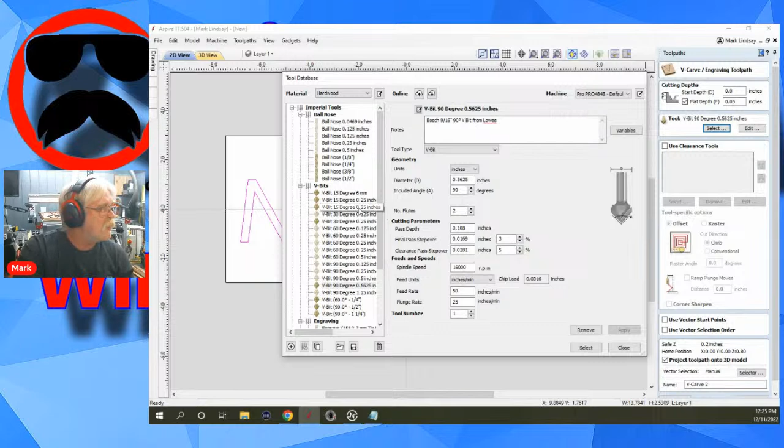Let's go ahead and get into screen share and let's V-carve this. I've got my - let's select a smaller bit than this. No, I don't want to update my database, stop asking me. My 15 degree, let's try that one. And then I'll use a clearance tool - I'll use a 1/8 inch end mill. No, let's use that one. Select. So I have two bits.

And I'll calculate, reset the preview. Now, if you'll notice, let me get rid of this one - this was the first one that I made. Delete this. If you notice, that created two separate tool paths. Okay, Michael? If you look at the little bubble that pops up, this one uses my 1/8 inch end mill, and this one uses my 15 degree V bit.

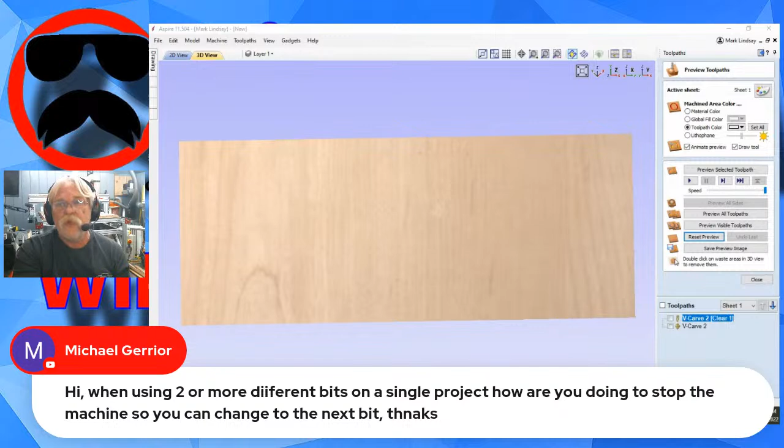So your question is, how do you stop the machine so you can change to the next bit? When you calculate the tool paths, let's go into save tool path here.

You have choices to make here, Michael. One of them is the selected tool path. Now you see I've got VCarve 2 Clear that uses my 1/8 inch bit. That is selected, it's in blue, and that is the tool path that's going to be saved right here. So I would save that tool path.

That's one piece of G code. Then I would come along and save toolpath 2. That uses my 15 degree V bit. Save that toolpath as a separate piece of G code. That's how I do it.

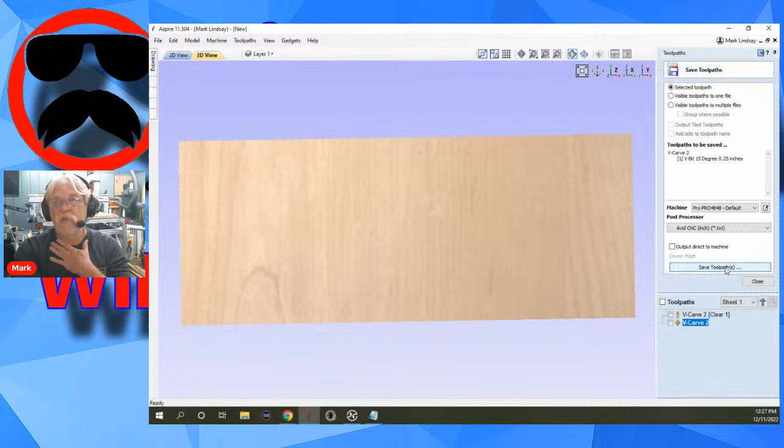You can put all of the toolpaths that use the same bit into the same G code and run those all at once, usually, not always, and then save the other type of bit, all of the toolpaths that use that other type of bit, as a separate piece of G code.

That's what I do. I do that because that way I'm in control of how long this carve is going to take. If it's a complex pattern and I've got 5 different bits I'm going to use because there is 3D artwork that'll use 2 different bits, and then a 3D clearing toolpath that's going to use another bit, and then a pocket and something else, like a V carving or what have you.

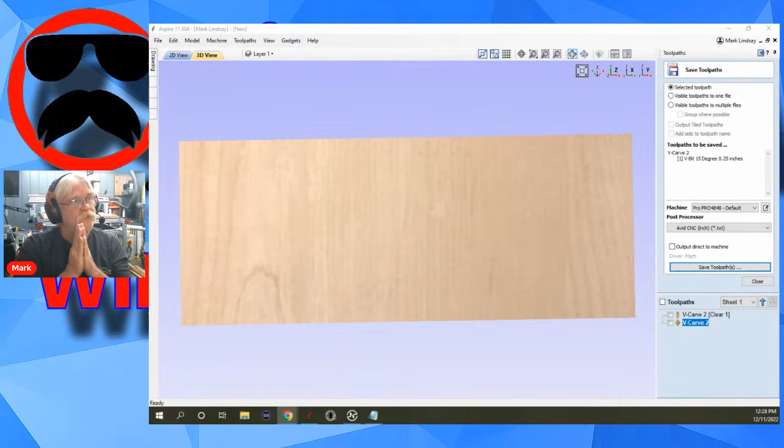If you put all of those toolpaths into one piece of G code, you're more or less trapped depending upon your controller software. Most controller software has a way for you to stop and then later on come pick up from where you left off. Not all, but most do. I would say 99% of them do. I can only think of one that didn't, and it may now allow you to do that.

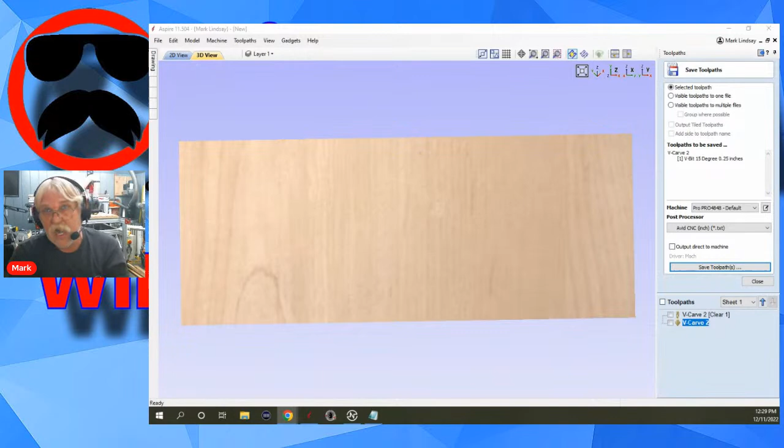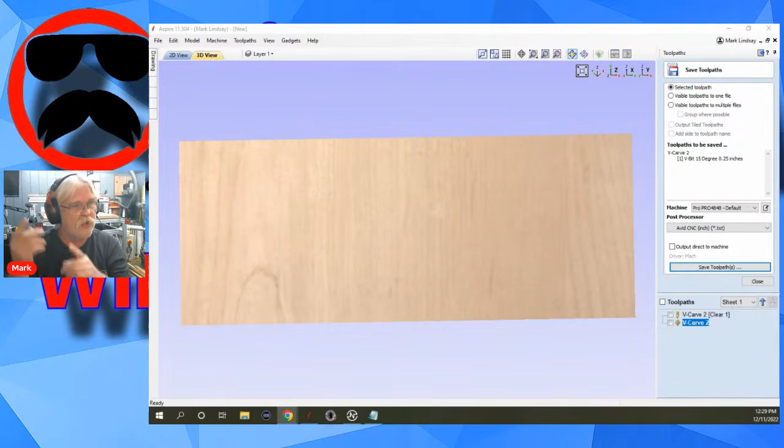But anyway, by saving separate G code files, I'm in control of when I run that. So I can come out and run my 3D carving, then look up, it's time for dinner, just turn off the monitor, shut down the CNC, go in the house, come back out a little bit later on, or maybe wait until tomorrow, and then finish running the G code for that project.

Now, if you come over here and you see visible tool paths to one file, it says no visible tool paths. What this means is a check mark in the two blanks. Now I've got both of them selected, and now we've got a warning up here.

The geometry of the tools are different. This is an error, this is a warning. And you'll notice my Save Tool Paths is grayed out. That's because the post processor I'm using does not support an automatic tool changer.

Now, I don't want to confuse this, okay? You don't, strictly speaking, have to have a physical automatic tool changer on your machine to use an automatic tool changer post processor. What that'll do if you're using a post processor that supports an automatic tool changer is it will stop the program when it's done using, for instance, this VCarve, the 1/8 inch bit. It'll stop the program and wait for you to do a tool change. Then you tell it you have done the tool change, and then go.

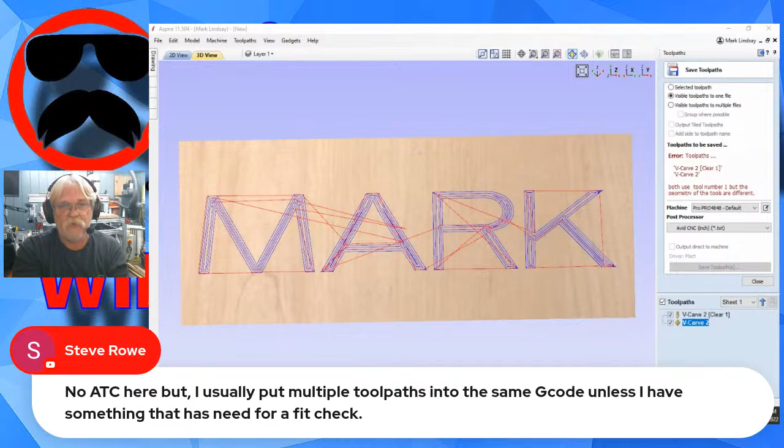Yes. I tend to not put them all in the same G code, mainly because I know me. If there's a way I can make a mistake, I will do it. So by putting all of the tool paths that need a 1/8 inch end mill into one piece of G code, I'll do that. If there's a way I can put all of the 1/4 inch end mill tool paths into one G code, I'll do that, with one exception, and I'll get into that in a minute. If there's a way for me to put both of those into one G code and make a mistake, I will do it.

That's just what it's like to be me. I will forget to change bits. I will put the wrong bit in first, thinking I need the 1/4 inch when I actually need the 1/8 inch, or I will make a mistake. I know me. So this is one of those safeguards that I put into place to protect me from myself, basically.

To each their own. I know people who use an ATC post processor and do manual bit changes, and they're absolutely happy with it. Steve Rowe apparently being one of them, and that's great. It's all down to your comfort level.

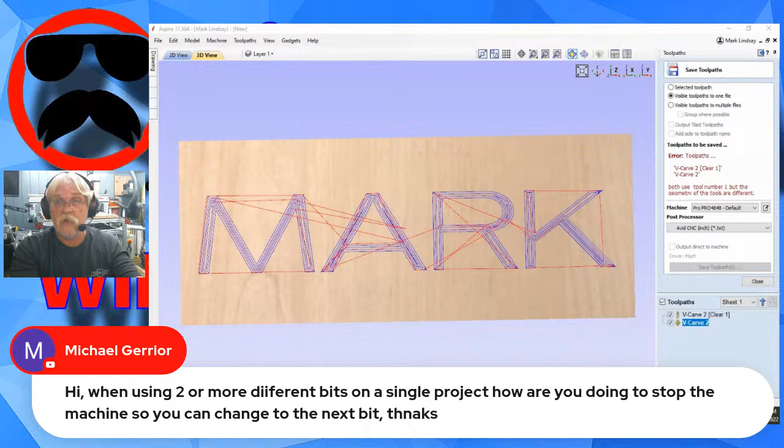There isn't a single answer to Michael's question, it's basically your comfort level. If you're comfortable putting all of them into one single piece of G code and your controller allows for manual tool changes, and there's an ATC post processor for your machine, then by all means be my guest. I don't do it that way because I know me. I want more control over what is running and when it's running.

I know a lot of people sweat the tool change, and to be fair, I did too when I was first starting out. But it's not as big of a deal as one would think. Once you get used to it, it becomes second nature. It really does. It's not that big of a deal as you get into it. I hope that answered that question.

Let's see. Bruno Fonseca, did I just butcher your name? I apologize if I did. Building a Queen Bee Pro CNC at the moment, 1500 by 1500 millimeter. How to reduce x-axis flex on such a long aluminum beam. It comes down to the size of that beam.

Let me get off of screen sharing here. If you look at the Avid CNC, that is a single piece of aluminum extrusion there, but it's made by... oh, what is the name of that company? I can't remember the name of the company now. Somebody out there in the chat, help me. I can't remember the name of the company that makes this extrusion.

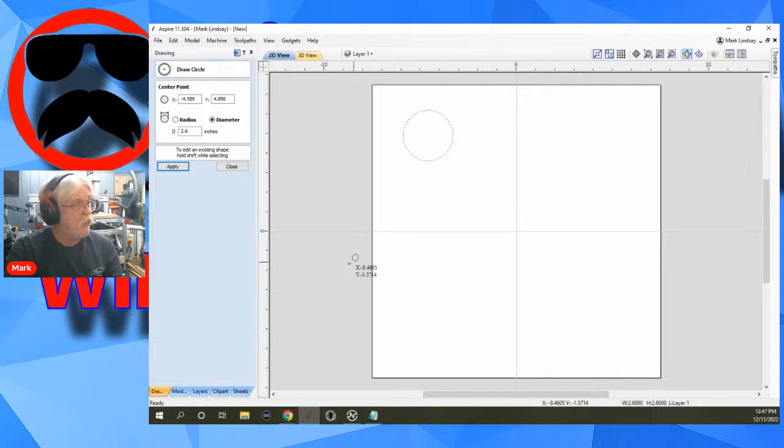Okay, now you want a series of round pockets. I'm not going to use your dimensions, I'll just kind of use my own, and that's good enough. And you want them, you wanted how many of them? Let me go back over to your question here. You wanted 8 pockets, 4 inches away from XY0. Okay.

Select it and go into circular array. Number of items is 8. Now the rotation center is here, that's where it's going to copy that array around. The object size I have now is 2.6. Okay, total angle 360 degrees, meaning you want to start here with number 1 and then end up back here with number 8. Now the thing about this is it's always going to calculate the position of these circles from the center of the circle, okay?

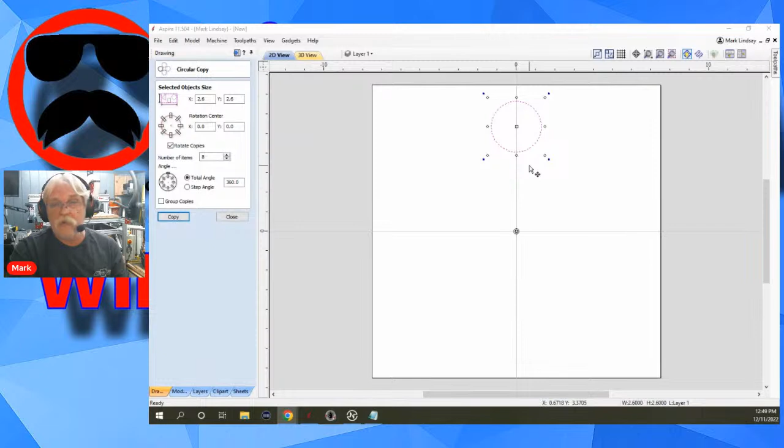So if you want them 4 inches out, and let's see what you said - you didn't say how big the diameter of the pocket is that you're making, but let me close that for a second here. Let me go back to a size that's easy to work with here, and we'll make it 2.0. Apply, close. Okay, now I can go into circular array. So I have a 2-inch diameter circle.

If I want the inside edge to be 4 inches away from this, what I'm going to have to do is figure out, because it's going to copy this based on the center, I'm going to basically have to place the first one so that the bottom edge or the top edge, whichever you're wanting to place, is at that measurement, because it's going to again base it on the center. So let me close this here.

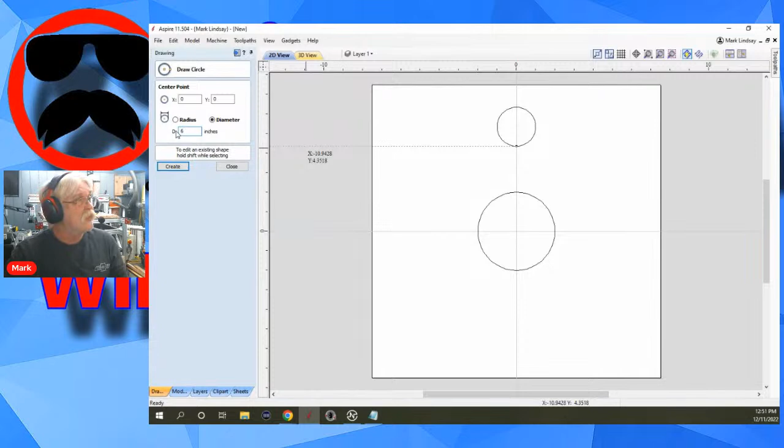You want a 4-inch circle. Let's go X0, and I'm doing this to illustrate what I'm talking about. 4.0. Hey, if I create a 4-inch circle, it's going to put the center of these circles on that 4-inch circle. But I know I have a 2-inch here. So if I take half of that, which would be the radius, and make that 1 inch, if I go with a 5-inch circle, that'll be a half inch larger, so I'll need to go 6-inch. Create.

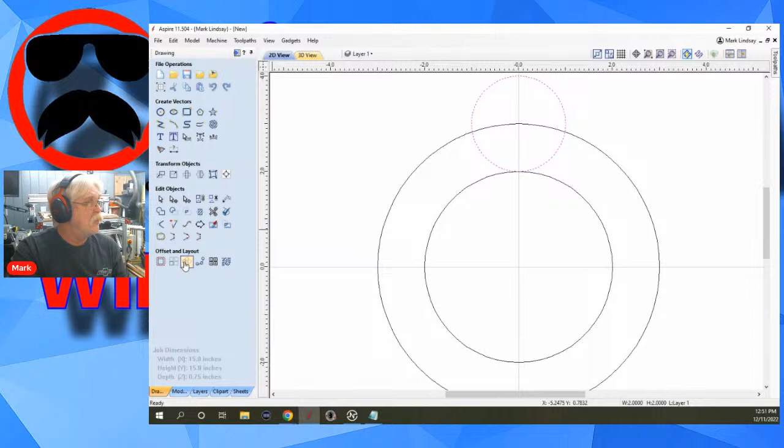And I bring this so that the center is right there. See how that puts that bottom edge right on that 4-inch circle. Now I can go into my circular array, a total of 8. Put the rotation center 0. Copy. And now I have 8 circles with the inside edge all touching that 4-inch circle.

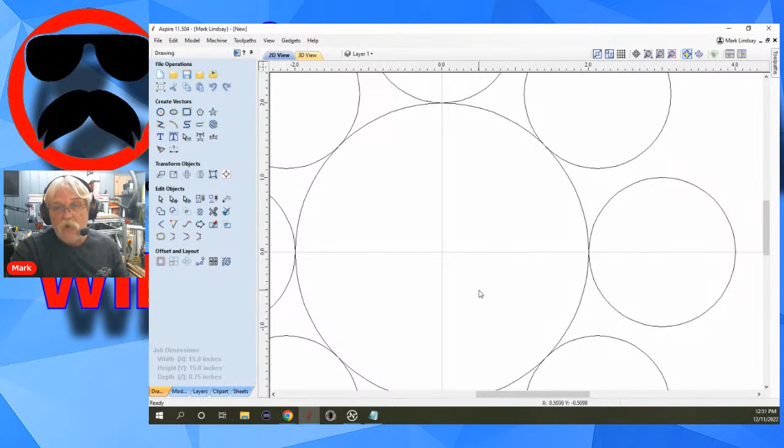Now, did that just confuse the stuffing out of you? Basically, what I did was I took this circle plus the diameter of the circle that I'm going to use. Control Z to bring that back. That's where it's going to place the center of each of these copies. Did that make sense?

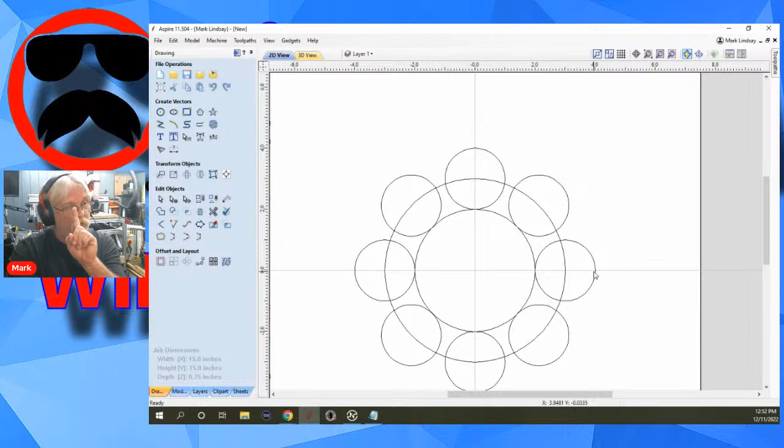Now, I know that's the radius of this circle, but I have a radius here and I have a radius here. That's why I added - take the distance you want from your center location and add the diameter of one pocket. That will put the center of that one pocket far enough out to where your pocket edge touches that 4-inch diameter area that you want it to be in. Then I can take those two, delete, and there they go. There are your pockets.

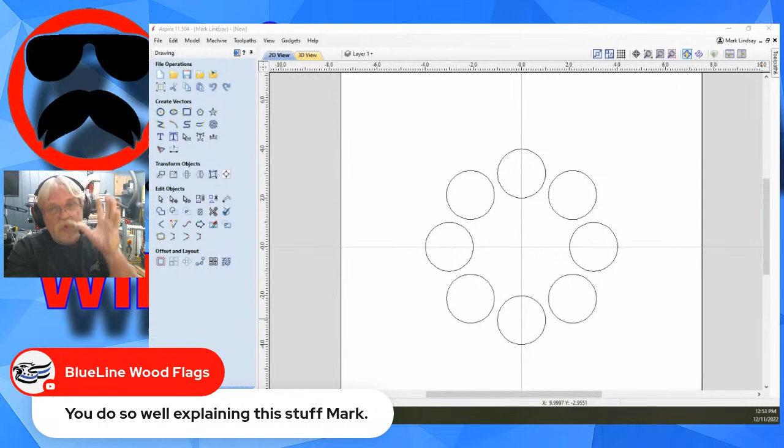So hey, Russ Tyndall, how are you doing, my friend? I got your email, I'm really trying to get back to you, but there's a bunch of stuff going on. Yes, we'll talk later. And thank you very much for the compliment.

I know how I learn, and I am not the sharpest tool in the shed. So I know sometimes people get on me about it. You explained it, move on. Well, I confuse myself.

So yeah, Tim, I hope that helped out. Okay, yeah, that's almost exactly what you need. All right, terrific. Yes, Brooks Martin.

Russ Tyndall over at Blue Line Wood Flags did an excellent video on CNC maintenance, and I think you're right about so many things brought up in that video. I'd add one thing, though I'm trying to remember if you mentioned it. Maybe you did and I just forgot.

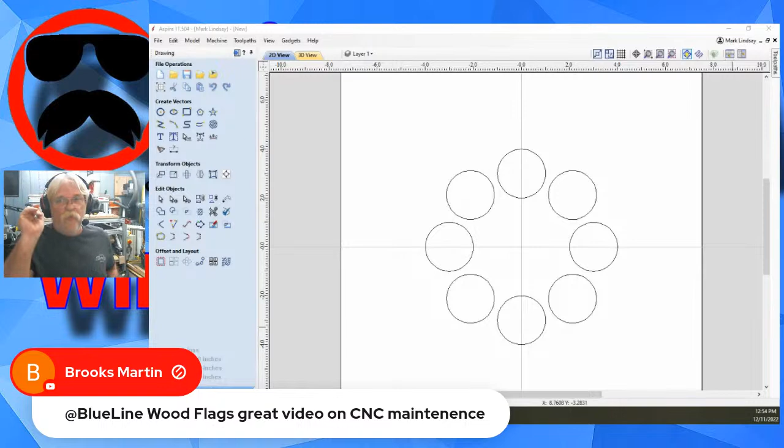Take a torque wrench with you and check your nuts and bolts. Check your fasteners. I know I get a lot of people saying, Mark, why do you always go on about torque wrenches? Tight enough is good enough.

Well, true, but don't forget these machines go through a lot of vibration, it's a dynamic piece of equipment. That gantry is slinging a lot of weight around, and you've got pressure every time that bit plunges down and comes back up, and on those linear rails on the sides with the Z moving back and forth, things can loosen up. You can Loctite things to death and they can still loosen up given the wrong impact.

So check the fasteners. I was in Army aviation, and you didn't go to the bathroom without a torque wrench. If you touched anything on that aircraft without one, it was your hide. I've got torque wrenches, some several years old - deflecting beam ones, ratchet ones, single click type.

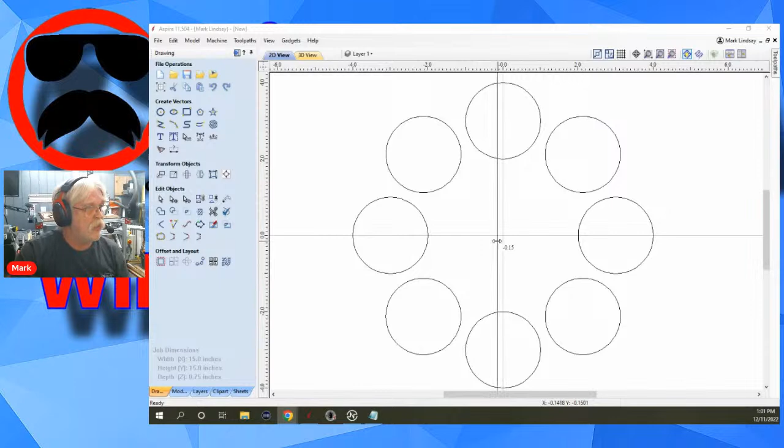Let me go back over here and we'll create a couple of guides. I'll drag one over to not quite the center, and a vertical one to the center. About the only way is to click and drag. You can't select a guideline. Let me click off to make sure I don't have anything selected.

Even if I put my cursor over the guideline and use my cursor keys, they are not actually objects. So the only way to move a guideline is to click and drag it, or right click and use your positions to move it to a new position. For instance, let's say I want this moved a half inch to the right, which would be a positive move. I could say plus 0.5 and click apply, and that's going to move that guide. Close this. That'll move that guide over.

Or I can create another guide in an absolute position, or relative to that guide, and make it 0.5 plus in the positive, which will create a new guide parallel to it. But the only way to move a guide is either with the cursor or go into the guideline menu. Now, Colorado Woodworking has a point here.

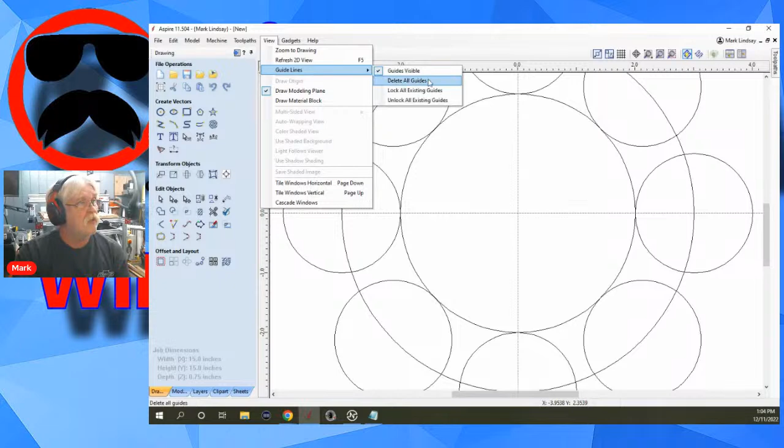But now I can't Control Z. All Control Z is going to do is undo the delete of those two round vectors there. So when you're looking at guides, all you can do is use the form or turn them off up here in the corner.

That is a button, or go up to View, Guidelines, and delete all guides or hide them. Now, I just did all of that. And if I go up here to edit, I can undo my array copy or redo my delete. And the keyboard shortcut for that, a lot of people don't know that. I just Control Z to bring these back.

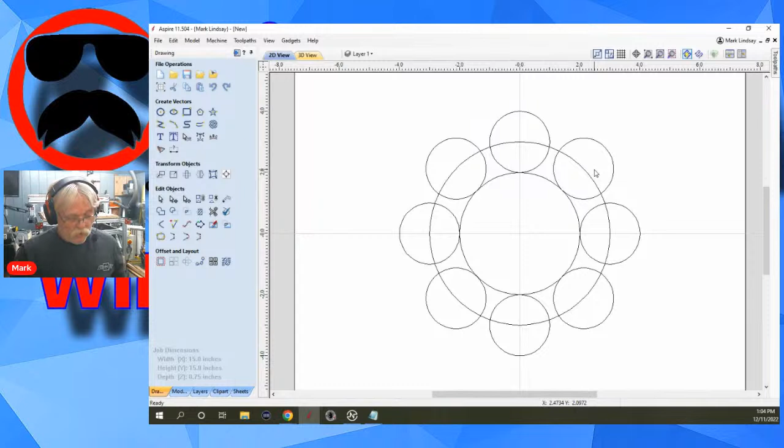Now I want to Control Y to redo it. So, all right, let's go back up here. One more, I know we're going over. Peter VanVleet says, how would you round over the top edge of a pocket or profile so that it doesn't have a sharp edge, other than using a separate router and round over bit?

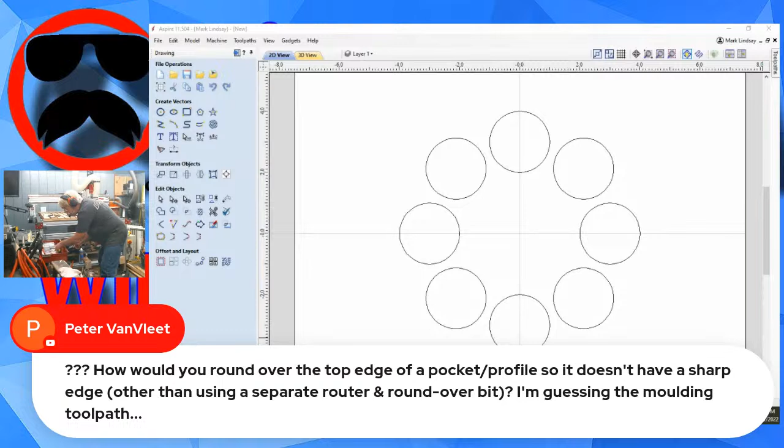Let me make sure I don't have it here. Let me go grab it. And that is to get a point cutting round over bit. And of course I need it and can't find it. That's not it, that's not it. You could use a molding toolpath. You could, if you have Aspire, you could 3D model it. There it is, okay.

This is a Whiteside model 1572 point cutting roundover bit. And it's a quarter inch shank, let me take it off of this. It's a quarter inch shank, and that's what it looks like. Okay, and it's Whiteside model 1572. I will put a link to one in the description as soon as we're done live here.

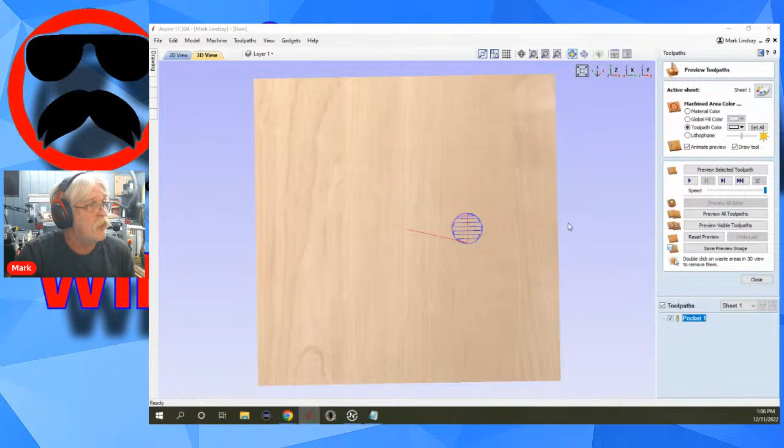And the way I would do it is, let's go back into Aspire, a little bonus time here. And let's pocket, well, let's just pocket one of these out because otherwise it'll take forever. And we'll go 3/8 of an inch deep, and I'll use my half inch end mill just to make this a fast one here. And we'll preview that, and there is the pocket.

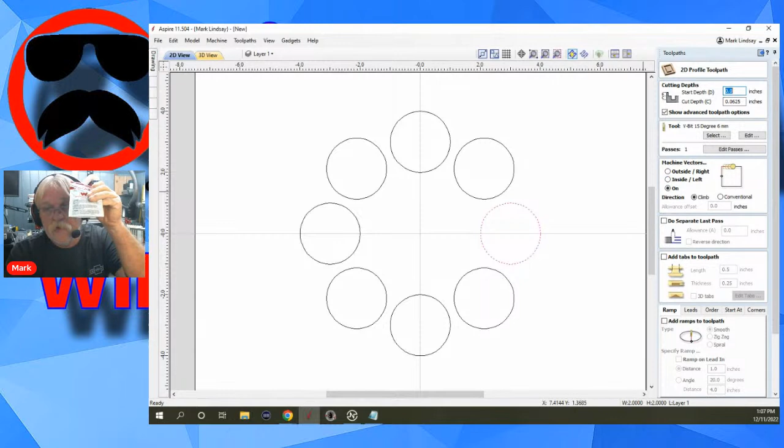Okay, now close that, and I'm going to take that exact same vector, do a profile toolpath with the point cutting roundover bit. This is a quarter inch. Okay, and Steve is absolutely right here, the point cutting roundover does have a tiny flat at the tip, a very tiny flat. Okay, so, but it is a cutter.

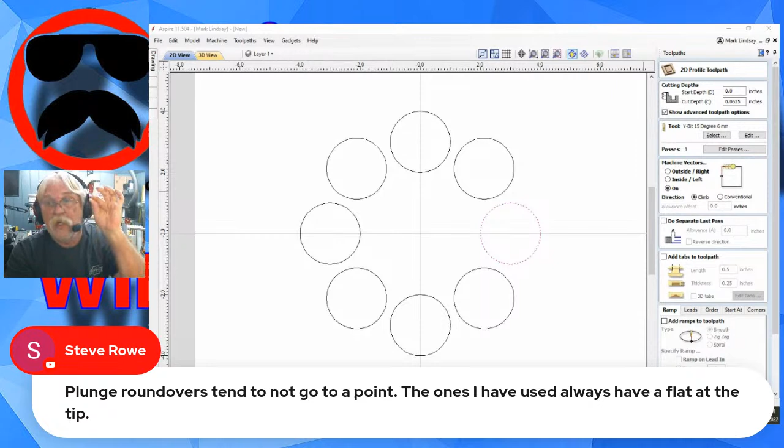That's the main thing, it can plunge and cut. Okay, so I'm going to, because it's a quarter inch radius, I'm going to make my depth of cut a quarter inch. Okay, then I'm going to come select the... no, good grief.

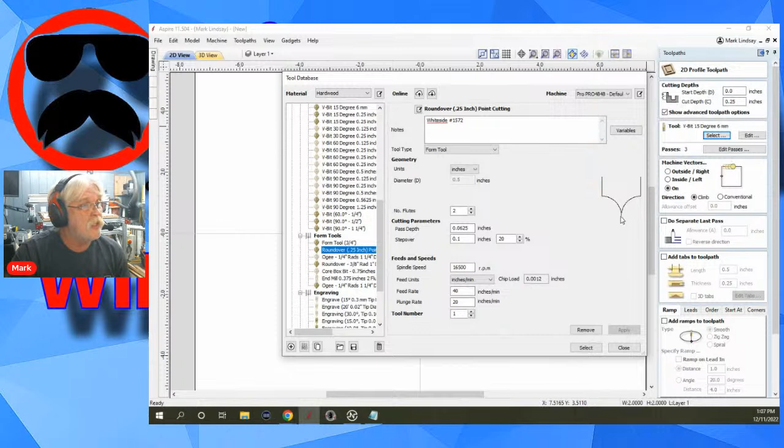There's my 1/4 inch roundover bit. I'm going to select that and use the roundover bit on the vector - that's the important part, on the vector. And we'll go ahead and calculate that.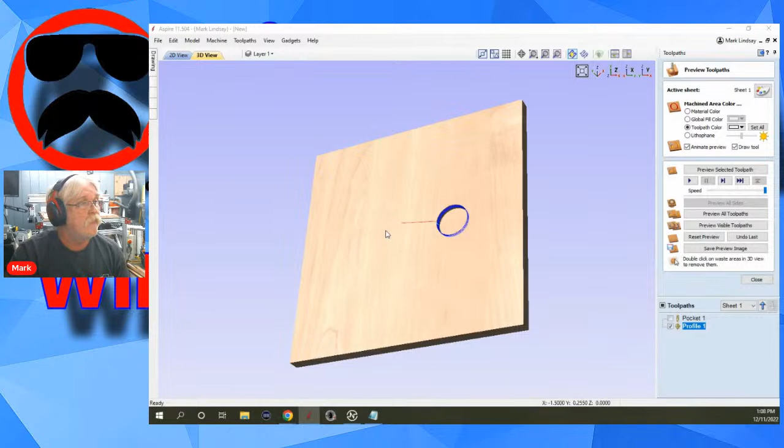Let me zoom in here so you can see it. I don't have the resolution turned up very well. Then I'm going to select that toolpath, and there you go - that rounds that right over.

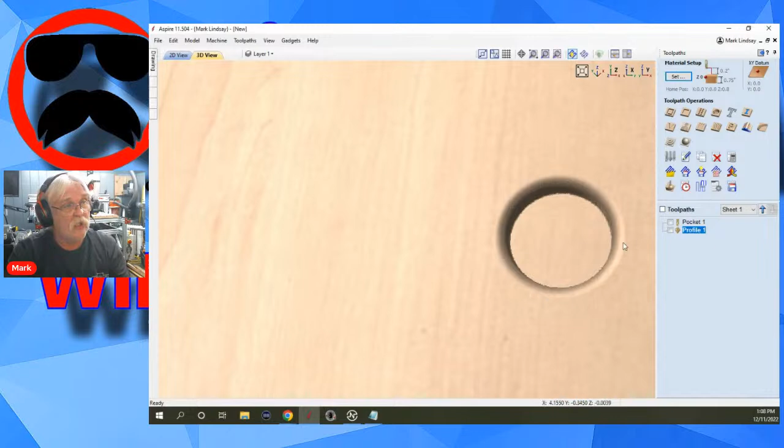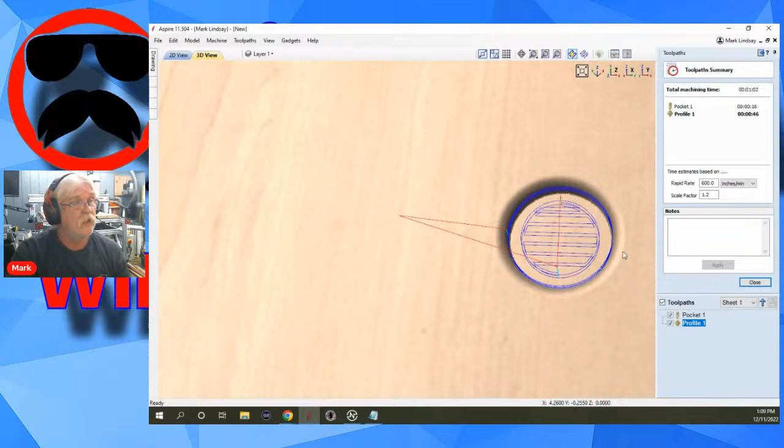Yes, you could 3D model it. Yes, you could use the molding toolpath. But if you have any experience with 3D modeling things like this, or cutting with the molding toolpath - that profile took 46 seconds. I have yet to find any kind of 3D carve that takes 46 seconds. And the only reason that took 46 seconds was because it took 4 passes to get to that depth.

Yes, Peter. And welcome to CNC. Welcome to CNC.

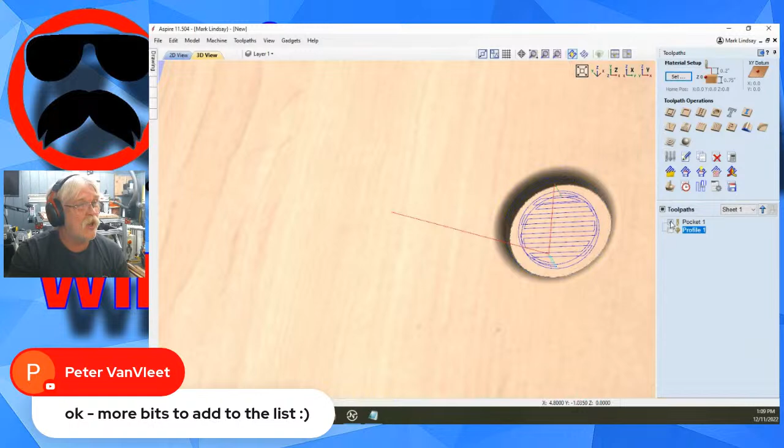Let me turn that off and go back into here, and we'll undo the last step to get rid of that roundover. Just as a little bonus here, let me go back into that toolpath, and I'm going to reduce this to 1/8 of an inch.

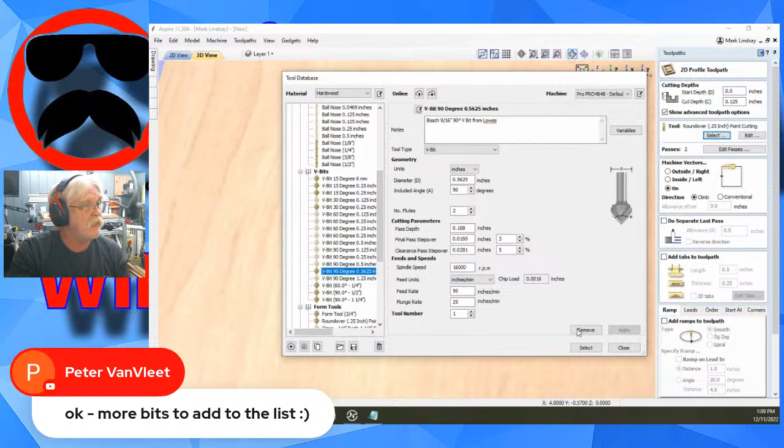Instead of using a roundover bit, let's use my 90-degree V bit. Select - same thing, no other changes, just a change in depth and a change of bit. Instead of a roundover, I now have a chamfer.

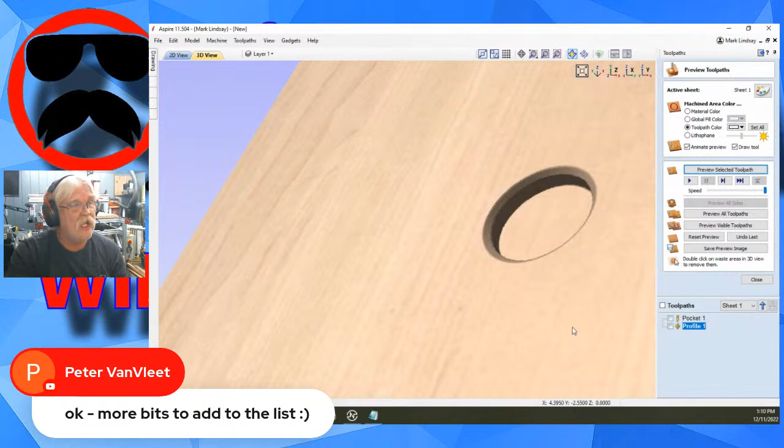So, lots of cheating - lots of ways of not so much gaming the system, but more than one way to skin the proverbial cat.